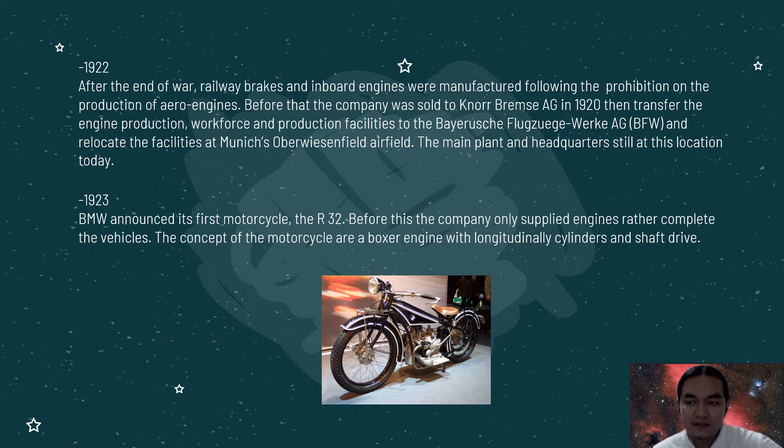In 1939, BMW developed an air-cooled aero engine, and 1 year later, before the threat of the Second World War, BMW took over Brandenburgische Motorenwerke GmbH, Bramo. Bramo is the facility used to develop aircraft engines. And after the Second World War, in 1945, Allied soldiers requisitioned and occupied the BMW plant, and the company started to focus on household appliance production. At this time, they called it stopgap, which is they stopped the production of cars and motorcycles instead to help the war victims.

Starting 1948, BMW started to produce more vehicles because of the success they saw with the R24 motorcycle produced in 1948. Then in 1951, BMW's post-war automobile was the BMW 501, built from 1952 and the years further. This car could seat 6 people and had a powered enhanced version of the 6-cylinder engine used in the pre-war BMW 326. And in 1961, a new car was introduced, the BMW 1500 model, at the 1961 Frankfurt Motor Show. This model gave a huge boost to BMW's reputation because of its unique design.

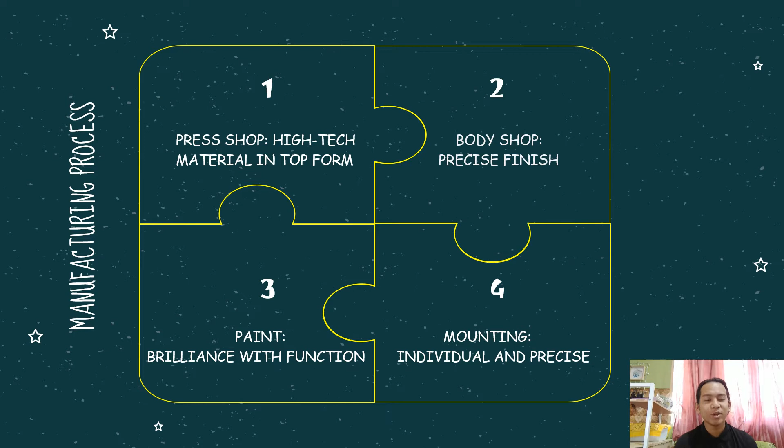My name is Muhammad Ikhwan bin Yahya, and I will present to you the manufacturing process and the technology applied in manufacturing BMW cars. There are 4 steps in the manufacturing process, which are press shop, body shop, paint, and mounting. So let's take a look at the first manufacturing process.

Press shop, high-tech material in top form. In this process, the coils, which consist of heavy rolls of steel and aluminium sheets, will be cut into boards, pulled, pressed in several steps, bent and punched, and thus produce the molded parts, such as the side frames, the hoods, the roof, and the doors.

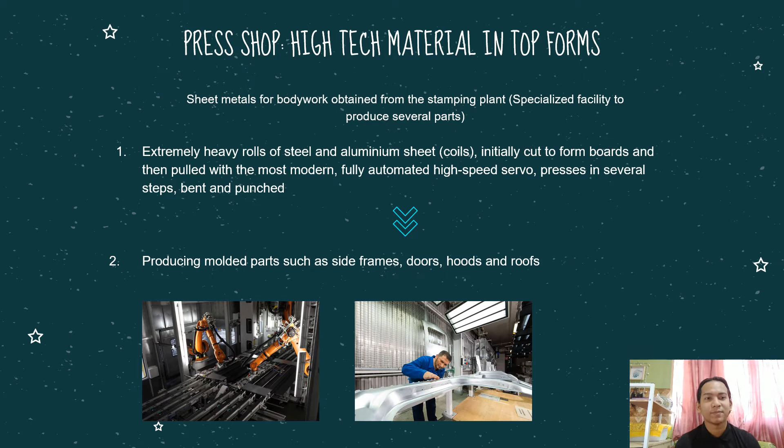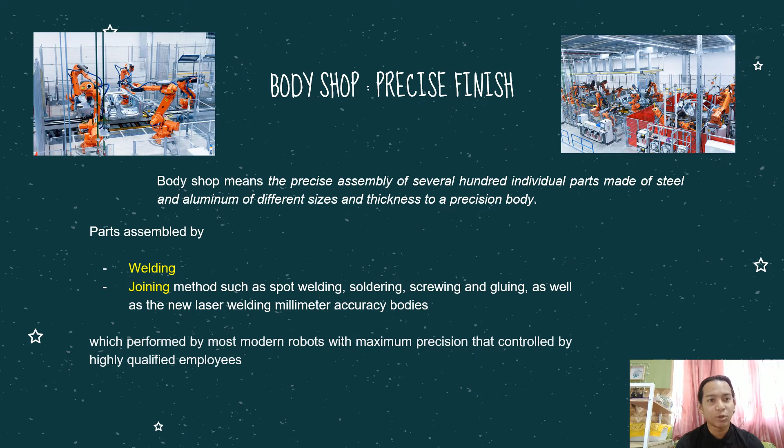Next, we proceed to the second step, which is body shop, precise finish. This is where hundreds of individual parts will be assembled into a body. All of the parts will be assembled by welding and joining methods such as spot welding, screwing, gluing, and laser welding. All of the processes will be performed by the most modern robots with the utmost precision, controlled by highly qualified employees.

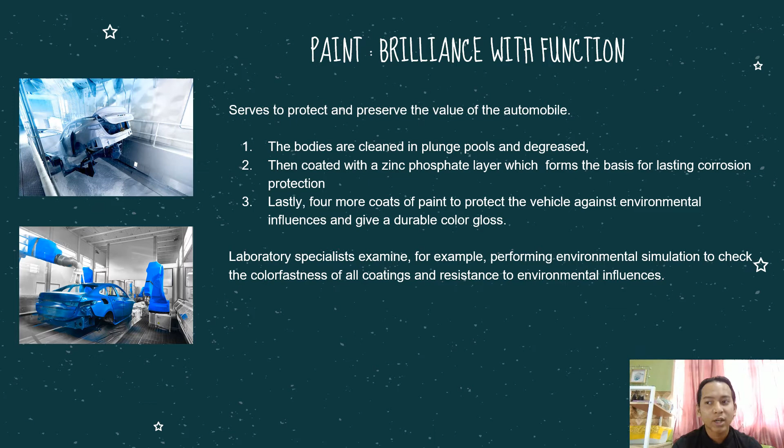Then paint, brilliance with function. In this process, the car will be coated with 5 layers of coating. The first coating is the zinc phosphate layer, which will protect the car from corrosion. The 4 more layers are layers of paint, which will protect from environmental influences and also give the car a durable color gloss.

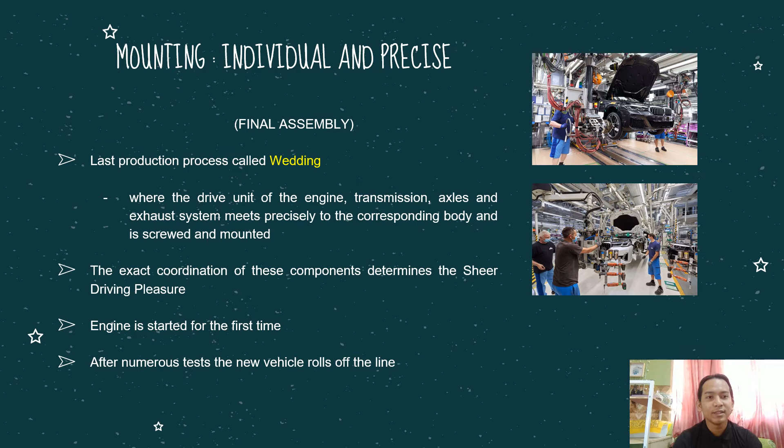Lastly, mounting, individual and precise. This process can also be called the final assembly. This is where the wedding process happens. The wedding process means the engine, the transmission, and exhaust system will be mounted and screwed into the car body. The coordination of all the components is really important because it will determine the sheer driving pleasure for all of the consumers. And then the engine can be started and it is ready to roll off the line.

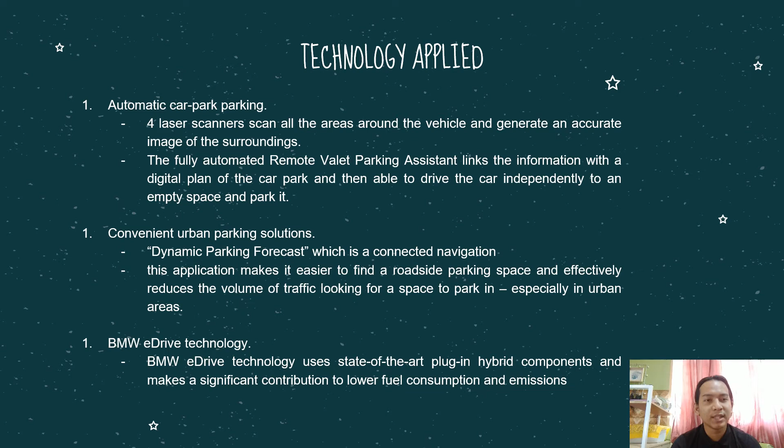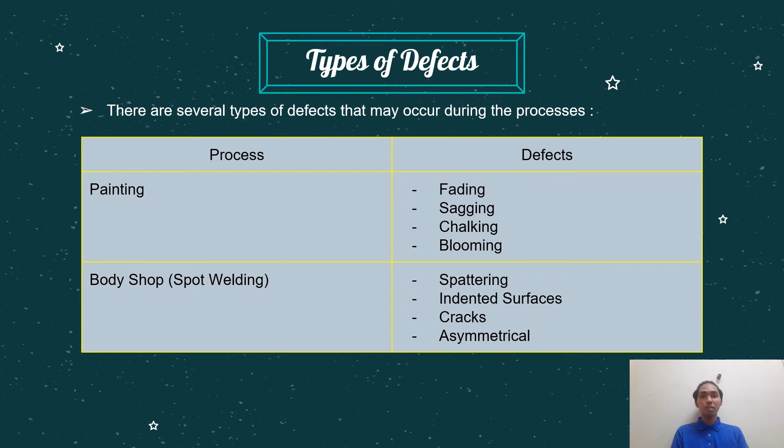So, as we know, there are several defects that may occur during the manufacturing process. For the painting process, the defects that may occur are fading, sagging, chalking, and blooming. While the body shop process, which commonly uses spot welding or resistance spot welding, may experience spattering, indented surfaces, cracks, and asymmetrical welds.

What is fading? Fading is the loss of one or more color pigments from the film of paint. What causes it are sunlight, infrared, ultraviolet radiation, temperature variations, the use of dark color paints as they tend to absorb more radiation from the sunlight, and finally, harsh environmental conditions. So how to repair and prevent? By using certified UV resistant paints or using lighter color paint as it tends to absorb less radiation.

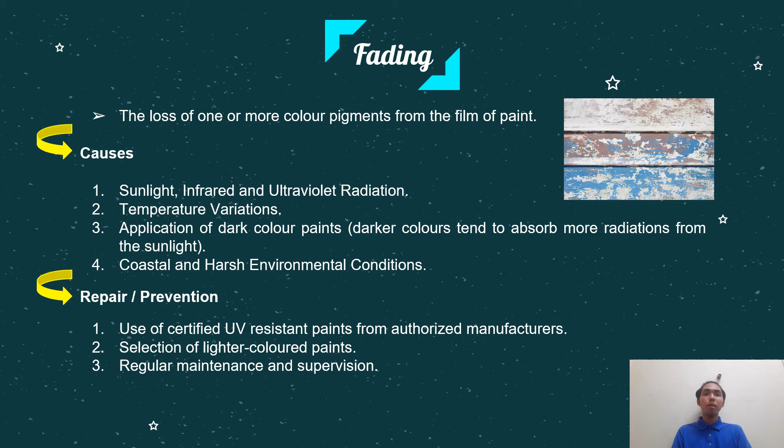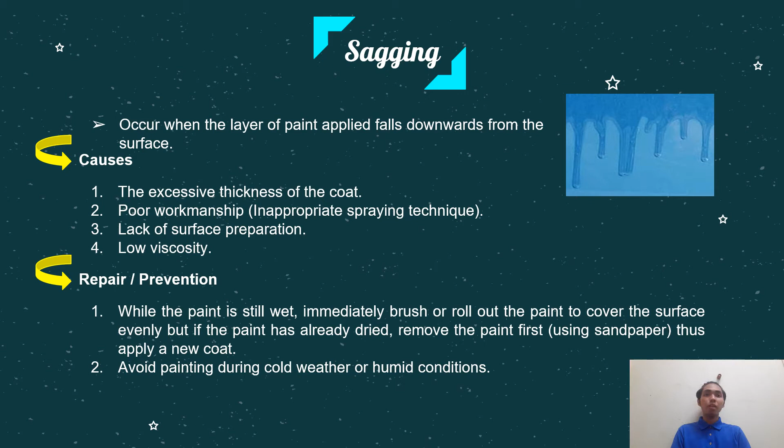And finally, regular maintenance. Sagging occurs when the layer of paint applied falls downwards from the surface. The causes are excessive thickness of the coat, poor workmanship that can lead to inappropriate spraying technique, lack of surface preparation, and low viscosity. To repair it, while the paint is still wet, immediately brush the paint to cover the surface evenly. But if the paint has dried, remove the paint using sandpaper first, then apply a new coat. To prevent it, avoid painting during cold weather.

Chalking is when there is a powder-like substance on the surface of the paint. The causes are the use of inferior quality paint and long exposure to sunlight. To repair and prevent, you can either pressure wash or scrub to remove the defect. Use water-based paint and a lighter shade of paint.

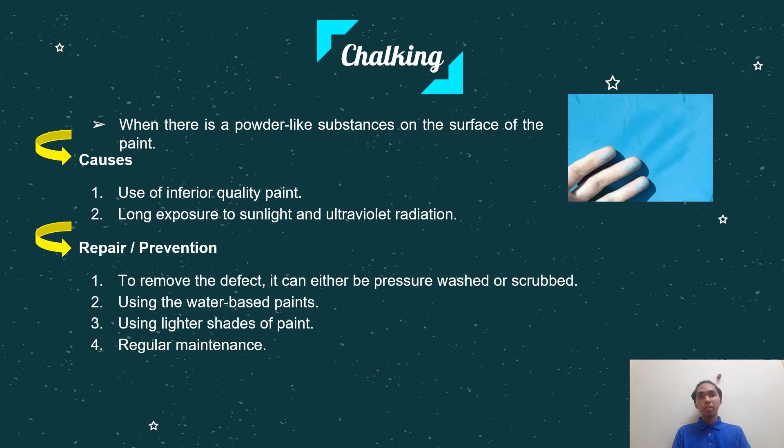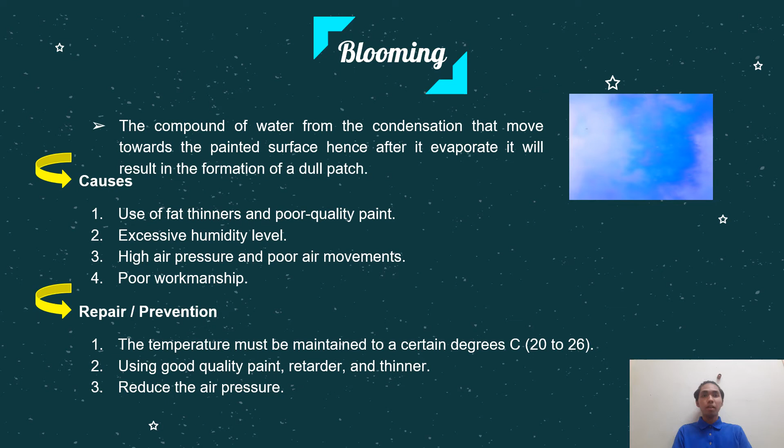Finally, regular maintenance. Blooming is when the compound of water from condensation moves towards the painted surface. Hence, after evaporation, it will result in the formation of a dull patch. The causes are the use of fast thinners and poor quality paint, excessive humidity level, high air pressure, and poor workmanship. So how to repair and prevent? First, the temperature must be maintained between 20 Celsius and 26 Celsius, using good quality paint. And finally, reduce the air pressure.

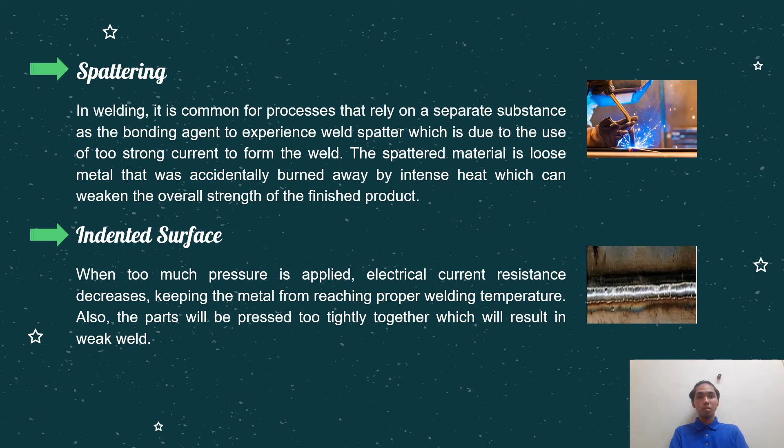Spattering. By using a great current to form the weld, it can create weld spatter. The spattered material is loose metal that was burned away, which can weaken the overall strength of the finished product. Next is the indented surface. When the pressure applied is too high, this will lower the electric current resistance, keeping the metal from reaching proper welding temperature. Also, the part will be pressed tightly, which will result in a weak weld.

Cracks occur when there is lower pressure applied to the welded joint. This results in low tensile strength for the weld. The last one is asymmetrical, which is due to misaligned electrodes or the presence of foreign contaminants in the weld, which will result in a weaker weld. So, in conclusion, the pressure applied is very important in avoiding defects in resistance spot welding.

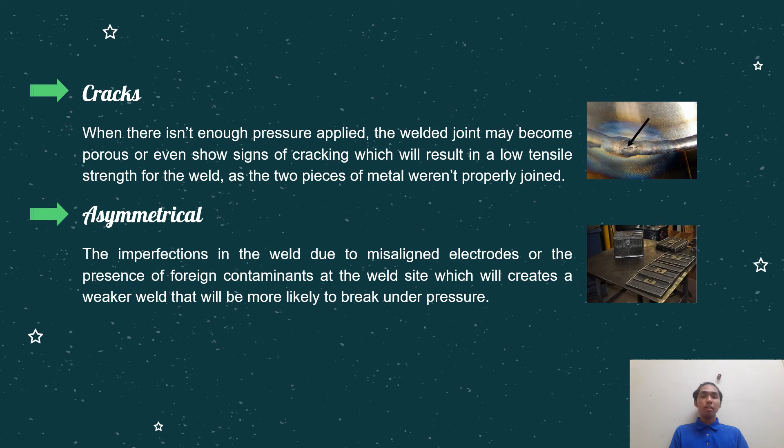In this section, I will present elements of IR 4.0 adopted by this company. So, what exactly is the fourth industrial revolution? According to some authority websites, it is a revolution in the industry sector to fully digitalize production, which means it is a modernization of the system. Because the BMW Group is a large corporation in the automotive industry, it has already implemented the innovations of the fourth industrial revolution, which is essential in order to remain competitive.

For the BMW Group, the fourth industrial revolution opens up new opportunities for the entire production system. It includes enabling fulfillment of individual customer wishes and enhancing the flexibility and quality of the production process. Digitalization technologies are also impacting the entire BMW Group production value chain, where every stage of production benefits from the use of digital processes.

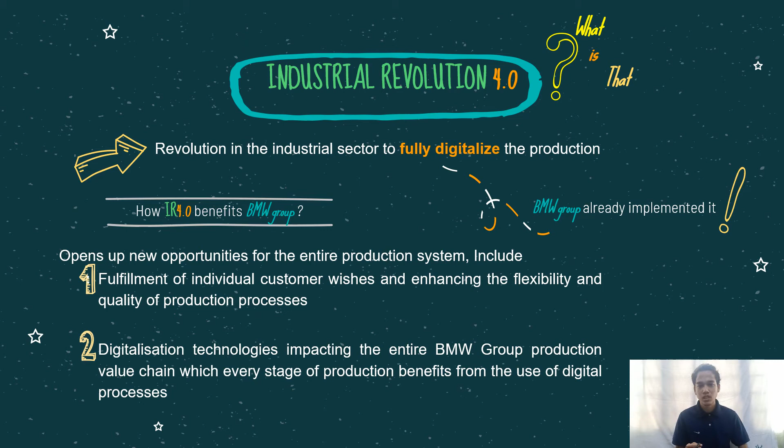So, what fourth industrial revolution elements are implemented by BMW Group? First, we look into smart data analytics. Artificial intelligence relieves employees of monotonous tasks. The use of artificial intelligence supporting employees in production is an efficient and reliable technology that ensures employees do not have to check model inscriptions or the data again during the final inspection. For instance, this is now taken care of by an AI system, which alerts the employee if an inscription is not correct.

Virtual reality for process optimization. In virtual reality, a 3D environment can be simulated in real time. It creates virtual space and scenarios that can be used to optimize processes and safety, for example, for the logistics sector.

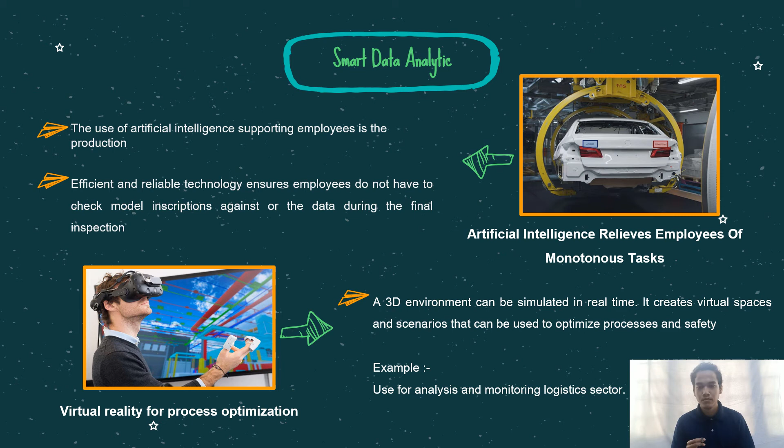Second, we will look into the smart logistic technology. Smart data technologies provide real-time supply chain information. This allows supply delivery to each platform to be adjusted quickly and flexibly to changing conditions. They also have autonomous tugger trains.

The use of autonomous tugger trains in assembly logistics. It acts like a smart transport robot and moves assembly components to various assembly platforms. These autonomous tugger trains use laser signals to navigate through the production halls.

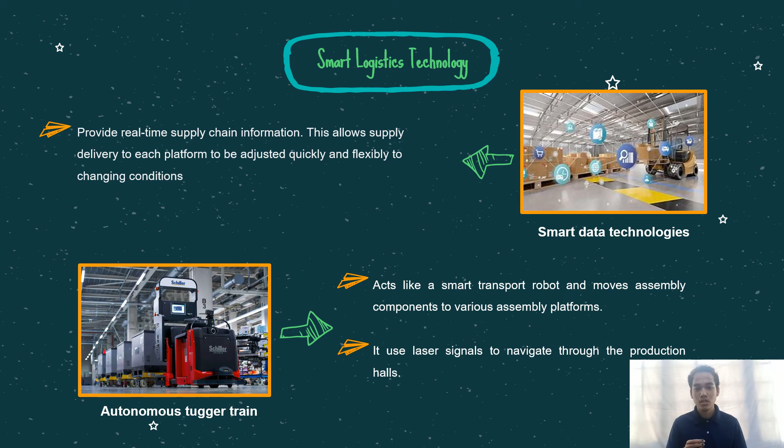Next is the innovative automation. A collaboration with lightweight robots, or we can call them robotic arms. Collaborative robots work directly alongside employees, where they perform strenuous and high precision tasks. They also implemented exoskeletons. The exoskeleton is like a second skeleton that serves as an external support structure for the worker's body, including arms, legs, and back.

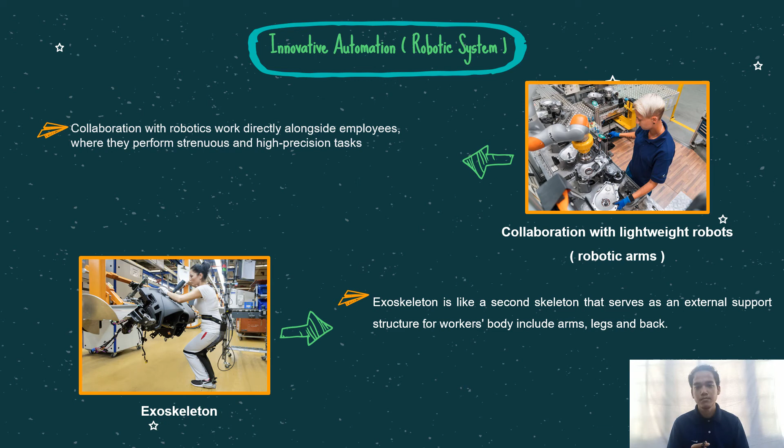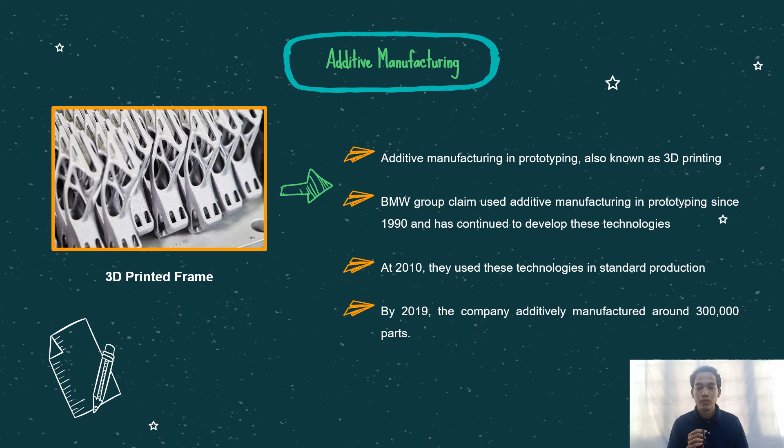Lastly, BMW Group also implements additive manufacturing. Additive manufacturing in prototyping, also known as 3D printing. On the official BMW website, they claim to have used additive manufacturing in prototyping since 1990 and have continued to develop these technologies. And in 2010, they used this technology in standard production. And then by 2019, the company additively manufactured around 300,000 parts for product manufacturing.

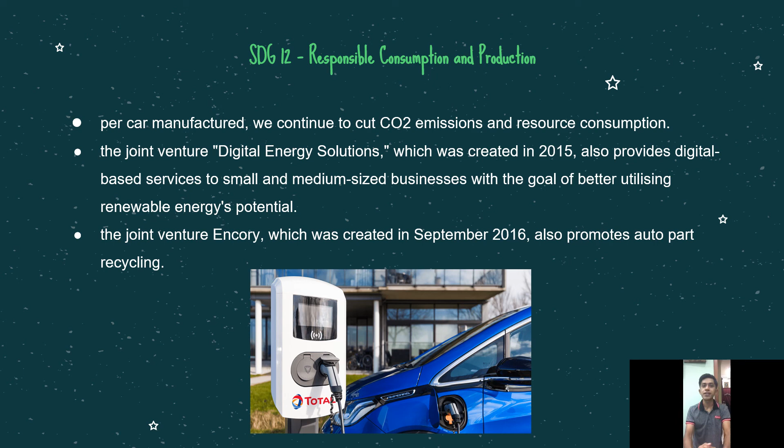Furthermore, through its investment fund BMW i Ventures, which has its registered office in Silicon Valley, the BMW Group invests in potential mobility startups. Then, Sustainable Development Goal 12, Responsible Consumption and Production. Per car manufactured, we continue to cut carbon dioxide emissions and resource consumption. The joint venture Digital Energy Solutions, which was created in 2015, also provides digital-based services to small and medium-sized businesses with the goal of better utilizing renewable energy potential. The joint venture Encory, which was created in September 2016, also promotes auto part recycling.

Lastly, climate action means electromobility is an important part of our carbon dioxide reduction strategy. We are steadily expanding the proportion of electrified drive systems in our model line, contributing not only to the reduction of greenhouse gas emissions, but also to the improvement of urban air quality. The BMW Group aims to sell at least 140,000 electric and plug-in hybrid cars worldwide by the end of this year, and it is on track to meet

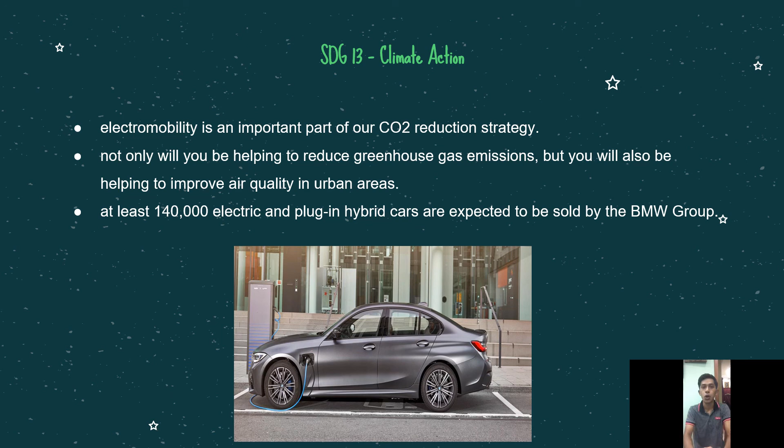that goal. Last but not least, we want to tell you that the BMW Group is committed to finding new and creative ways to contribute to advancing the sustainable development goals on both global and local levels.